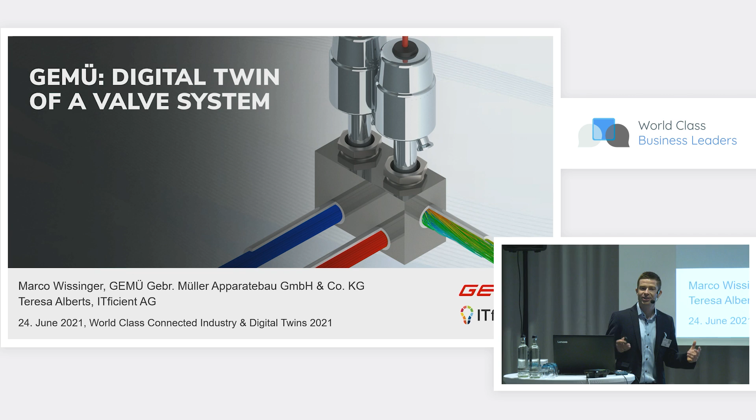But first, a short introduction. My name is Marco Wissinger, and I'm a development engineer at GEMÜ. I've been with the company for 2 years now, and I'm working in the pre-development department at GEMÜ.

Hello, also from my side. My name is Teresa Alberts. I'm the CEO of ITficient and had the pleasure to do the project management for this project with Marco.

So I will go on with a short introduction of GEMÜ, my company. GEMÜ was founded in 1964 in a small city in the northern part of Baden-Württemberg. GEMÜ is today one of the global leading manufacturers of valves, control and measurement systems, and considering sterile application, GEMÜ is here the market leader. Starting with 1 employee, GEMÜ has grown to a company with more than 1,900 employees with a total group turnover of more than 330 million euro.

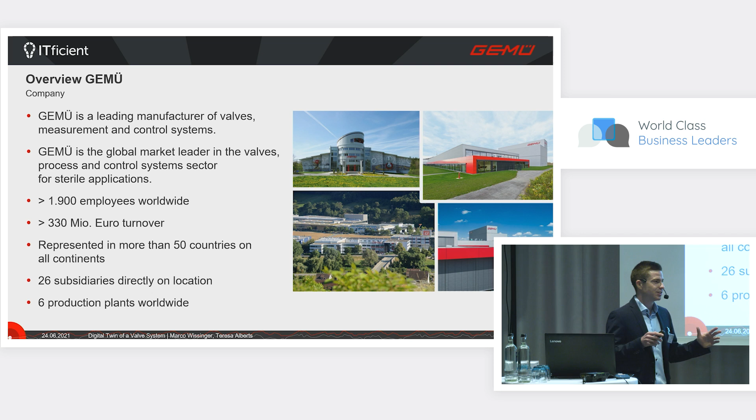GEMÜ is of course not only represented on its German sites, which you can see here on the slide, but also in 50 countries on all continents, including 26 subsidiaries and 6 production plants.

To give you more information about the organizational structure, I prepared the following slide. In general, GEMÜ is divided into 4 major business units. The first is displayed here on the slide: the business unit Food, Pharma, Biotech, and the representative product of this business unit is the so-called multi-valve port block, or M-Block, made of stainless steel,

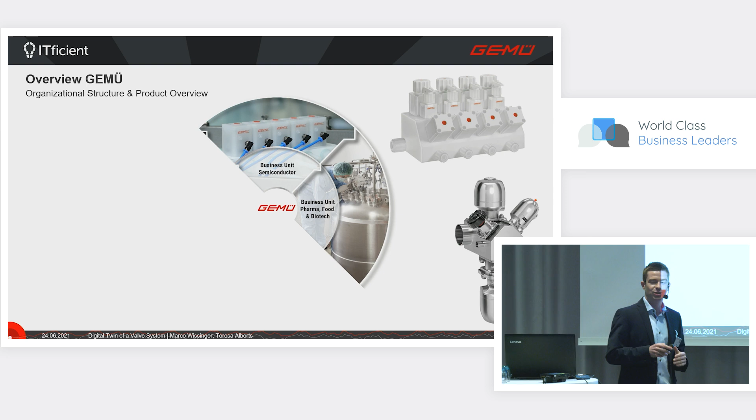which has very good capabilities in cleaning and is very space saving. The second business unit is the business unit Semiconductor, which is a very fast-growing one. Here, valves made of plastics and M-Blocks made of plastics. One special kind of plastic is a fluoropolymer, due to the aggressive media our customers use in their processes.

The third business unit is the business unit Industry, and here high demands on lifetime and huge cross-sections are with our products. The last one I want to mention is a small business unit, the business segment Medical, and here our products are involved in complex analysis and lab machines of our customers.

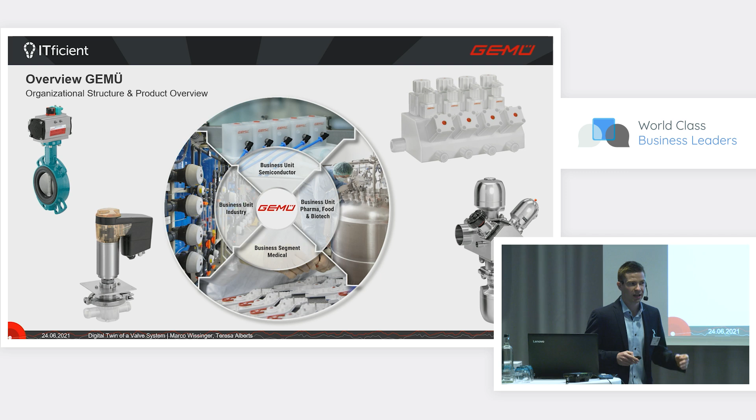Here you can see a single-use valve body which is mounted underneath one of our electric drives. So GEMÜ is not only developing and manufacturing electric drives, but also pneumatic and manually driven drives.

Products of GEMÜ and their usage at our customers' processes are of course not that familiar for people like you, which are not involved in the world of valves in general. So I prepared a picture on which you can see an example process, an example for a bioreactor or fermenter, which we developed and manufactured for one of our customers.

The main purpose of this bioreactor is to grow a certain bioculture in its tank. As you can see in the slide, the dimensions of this bioreactor are not that big, at least compared to some other processes of our customers.

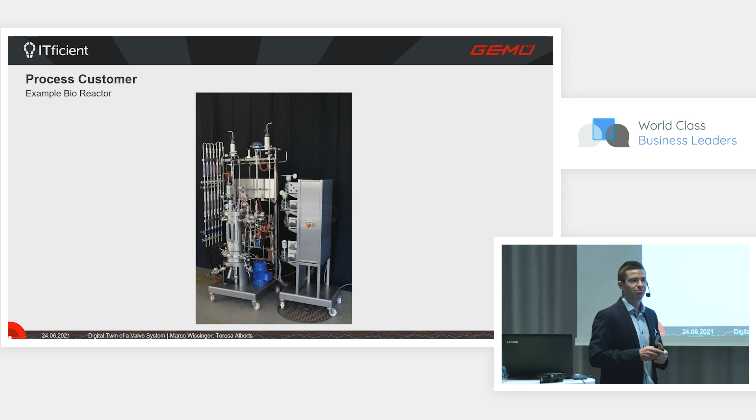I prepared a schematic drawing of this bioreactor, and as you can see, it's pretty complicated, but indeed it is. You can see all the components involved in the process, and it's not only the growing of the bioculture, but also the sterilization process and the cleaning process, which has to be considered while manufacturing and engineering the process.

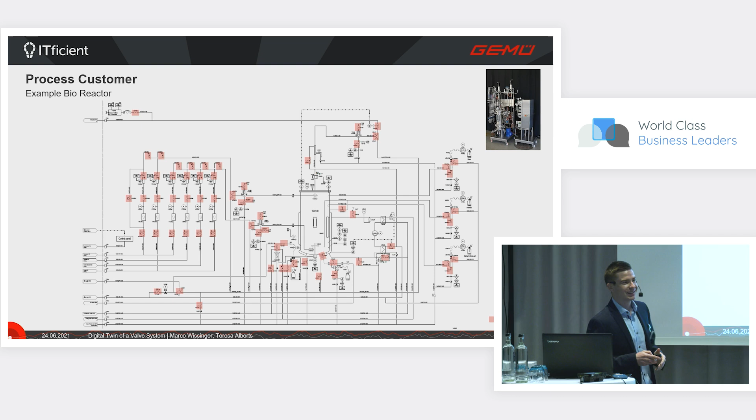To give you more information about the importance of the GEMÜ valves involved in this system, I colored all the GEMÜ valves included here in red. As you can see, there are quite a few GEMÜ valves involved, and they are very important for the operability of the system.

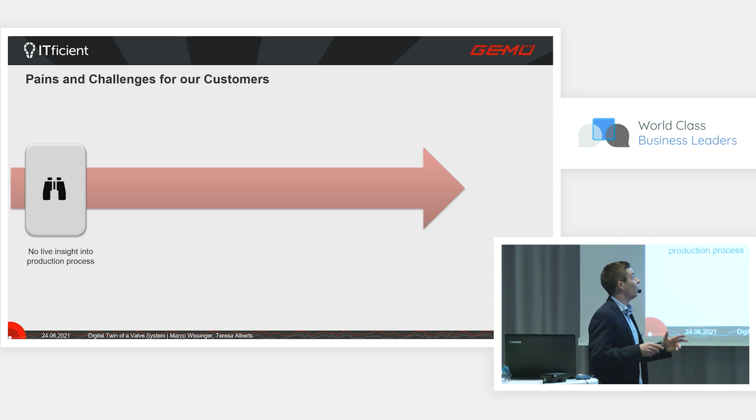Going on with the pains and challenges our customers face every day in their daily work. For example, today there is almost no live insight into their production processes due to the lack of physical sensor data. Of course, the asset costs are pretty high, due to the requirements of our products to get easy to clean and have high purity.

The processes of our customers are pretty complex, so the performance of these processes has to be evaluated while engineering them in advance for a lot of different boundary conditions. Of course, downtime is pretty expensive, whether due to maintenance, failure, or cleaning of these processes. And the last thing I want to point out, a very important one in my opinion, is that the product quality of our customers' products is often pretty critical. Think about medicines, pills, vaccines, or even food.

So we searched for a technological way to tackle all these challenges and pains, and therefore we found the concept of the simulation-based digital twin of a valve system.

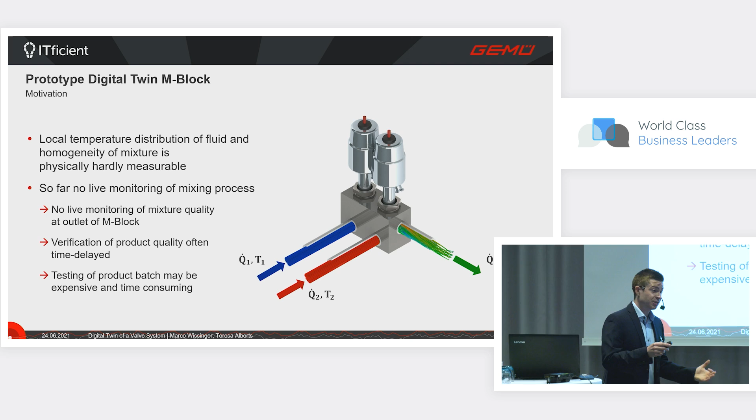And think about much more complicated mixing processes. The verification of these processes is often time delayed, and the verification process itself is of course time consuming and even expensive.

Therefore we wanted to create the prototype, and the main objective was to give a real-time forecast about the homogeneity of the flow and the local temperature distribution, based only on two physical sensor data points, namely the volumetric flows at the inlet of our M-Block. So with the real measured sensor data of these two inlets, we are able to give a real-time forecast about the homogeneity of the flow and the local temperature distributions.

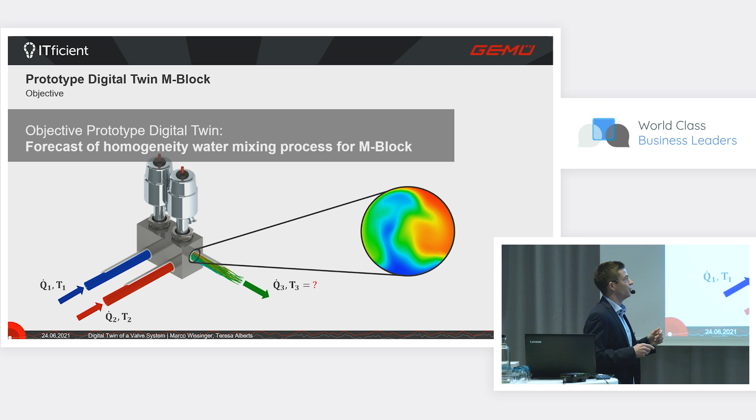So now I want to hand over to Teresa to go on with the project approach.

Thank you. So you have heard about the prototype and the use case, and I think it was very important at the beginning to discuss what is the best use case to start a project with the digital twin. So what we did is we did a workshop. We sat together with different departments at GEMÜ and discussed possible use cases, but also discussed the big picture, what they want to reach with the digital twin, and also what's the added value for GEMÜ as well as for the GEMÜ customers, because at the end, the digital twin should always be an instrument used from both sides.

We started with that in a first step, and also had a look at the IT infrastructure and the different simulation models that were already used in product development. After that, we started with the prototype, and I think that was a very good approach to do it in a very short time.

So we did the prototype in different milestones. If you call it MVP or proof of concept, it actually doesn't matter, right? But to have fast results and show that, and have the possibility to show that to different people. After the prototype, we did the validation phase, which we'll speak about later, and I think that's very critical.

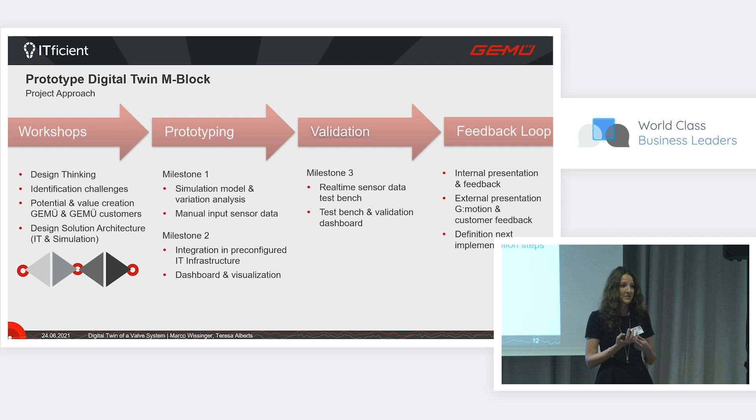If you speak about digital twins and specific information that you deliver, it's very important to be sure that the information is right. After that, we did the feedback loop with management and showed the solution to different customers. GEMÜ had an event two weeks ago, the G:motion, where they really showed the digital twin and went into discussion with the end customers, which was really interesting, and then went on to further develop the solution.

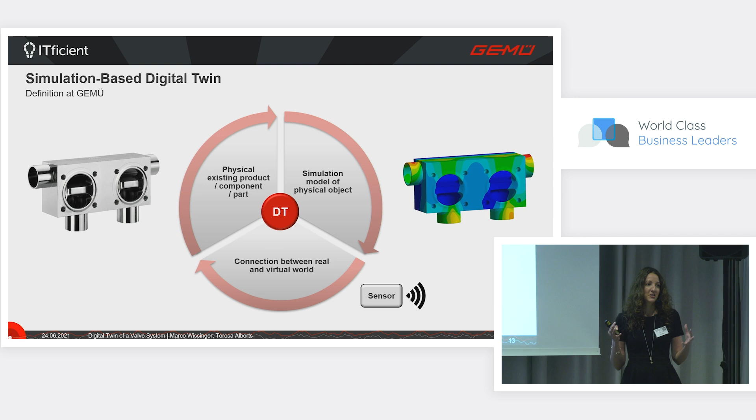So when we speak about simulation-based digital twins, I'm not sure if you're aware of the combination. It's actually what everybody knows, I'm sure, in this room: you have a product, you have a component, you have different sensors, right? And then normally the challenge is, you know it, that you are not able to place sensors in all the places that you need, right?

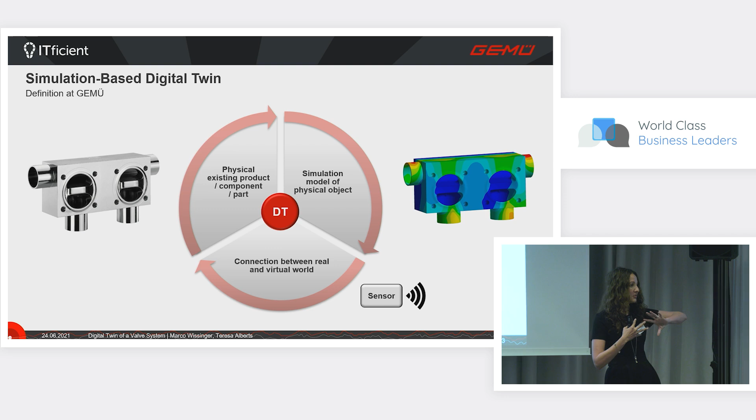To really get the information and do the prognosis and the analysis, what we combine is the existing component and additionally a simulation model, combining the know-how from the whole product together with the know-how from engineering, and then doing analysis and predictions in combination of both sides or both sources.

To go a bit deeper from the technology point of view: you have the component and the simulation model. If you work with simulation, you know the challenge is that creating the model takes time. So what we did here is use the reduced order model method to make it real time, so you're able to measure the information in real time.

The combination of these two worlds has the nice advantage that you're able to place virtual sensors, and that's what we'll show you in a second. This means you can place sensors virtually, put them into the data set, and use it further, for example for predictions, lifetime analysis, what-if scenarios, and then use the information further in the company.

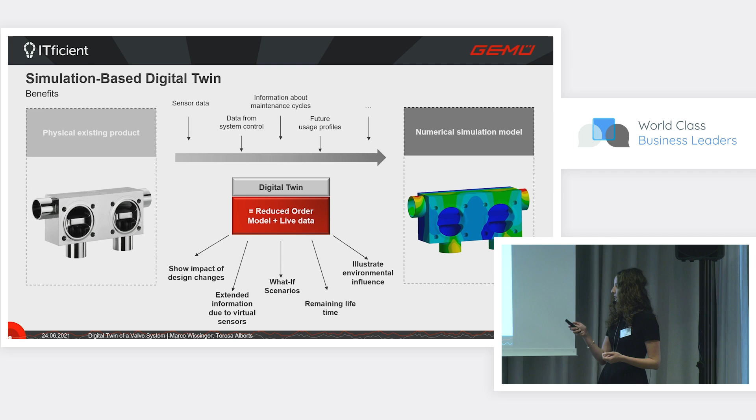Marco will show you in a second how the prototype looks. From the setup, of course, you have sensors, then you have this reduced order model where you feed existing sensor data, combine it, generate these virtual sensors, and then visualize it.

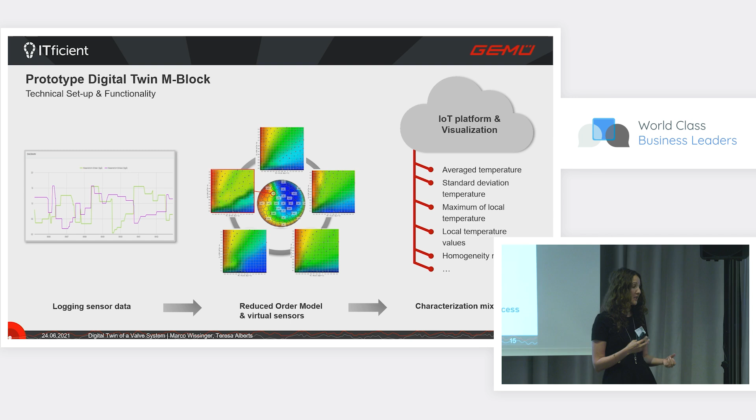We put this information into an IoT platform with the visualization that Marco will show you, to really characterize this mixing process and get more insights and information about the temperature, average temperature, and homogeneity of the mixture.

I think that's what I'd really like you to take with you: it's not possible to have real sensor data at this outlet, and if this information is really important, then with virtual sensors you can combine it.

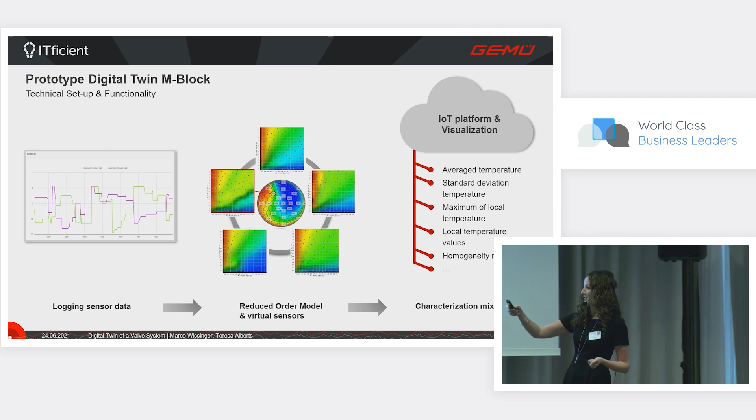So then, Marco, if you would take over and show the prototype. Of course, thank you very much, Teresa.

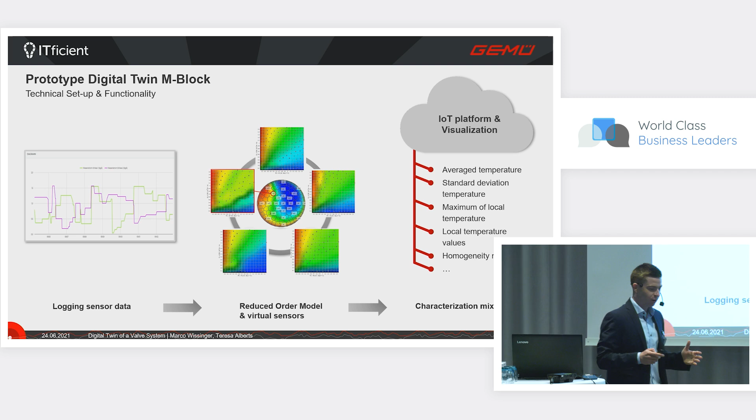As Teresa mentioned, with the simulation model we're able to get information about local temperature distributions and homogeneity. With these simulation results we're able to characterize our mixing process completely, and the information is afterwards displayed on a certain dashboard, which you can see here.

Before I start a short video to show you all the nice features of this dashboard, I want to mention a few words. As you can see, the dashboard is pretty simple, so it's understandable for almost every person. You don't need knowledge about simulation techniques or mixing processes. So I'll start a video and give you some information about the features.

As you can see on the top, there are the real measured sensor data, sensor data of the volumetric flows. In the lower part of the diagram, you can see the volumetric flows of the real sensor data over time, and also some virtual sensor data. Here, maybe you can see it in the bluish line, it's the average, which is a simulation result. It's not only the actual data displayed here in the diagram, it's also some historic data.

We're able to go even further into the past with the use of the calendar, which you can see here. Let's check what happens if we change the volumetric flows at the inlet, so the process parameter changes. You can see that the actual values of the sensors change, but more importantly, at the right side of the slide, the results of the simulation change almost in real time.

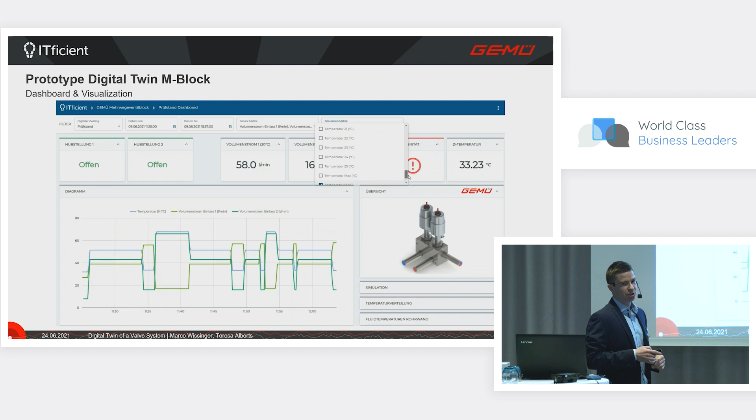That's the palette of, let's say, the physical sensor data, but the next one is the virtual sensor data, and it's a huge palette, mostly local temperatures in the fluid or information about homogeneity and standard deviation. So let's pick the standard deviation of temperature in the outlet cross section and the homogeneity information, and you can see the diagram dynamically adjusts according to the changes, and now the actual and historic states of these virtual sensor data values are displayed in the diagram very nicely.

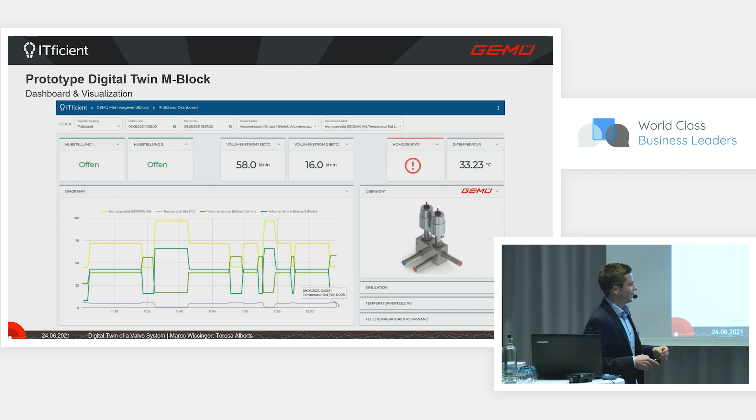A very important feature, in my opinion, is the next one. You can see a contour plot of the temperature in the outlet cross section, and with just one view you can see that the homogeneity of the flow is not good at the moment for these process parameters.

But let's see what happens if the volumetric flows at the inlet change, so the process parameters are changed by our customers, and you can see that the contour plot dynamically adjusts in real time. So it's the simulation results in real time, which you can see here.

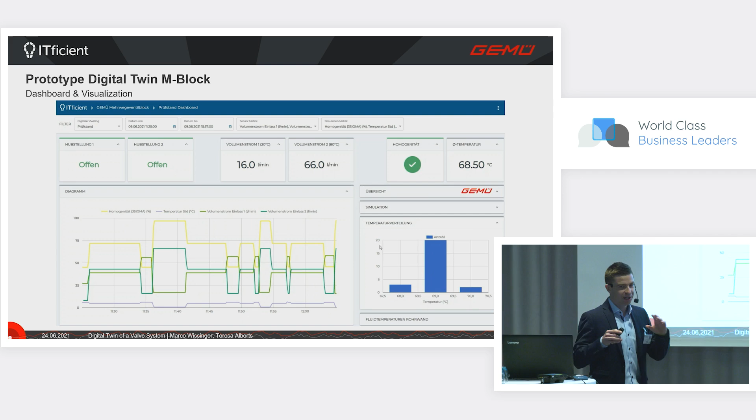And the last thing I want to point out is some kind of histogram of the temperature distribution, which you can see here now. Again, you are able to get information about homogeneity and local temperature distribution at the outlet cross section. I think this shows really nicely - this was the prototype done after 3 months - the different points like virtual sensors, the combination, the homogeneity that was shown, how you can show that in an easy way to discuss it and then further adapt it.

And when we did that, of course, you get specific results, and then everybody's asking, okay, how good are the virtual sensors really? So this means this actually is the next step that must be done: the validation.

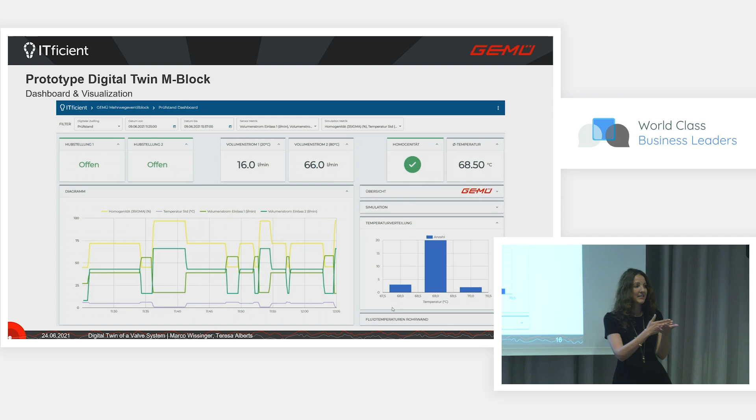As Teresa mentioned, yeah, of course, we wanted to perform the validation to evaluate this new technology in our company. The results were very good. We had a good fit between the predicted temperatures and the real measured sensors.

Some words to the experimental setup used for the evaluation or validation process. You can see it here on the screen - for example, the inlet of the hot and the cold water. You can see the physical twin, so it's the M block we used for our validation, and you can also see some sensors we used for the validation, some temperature sensors.

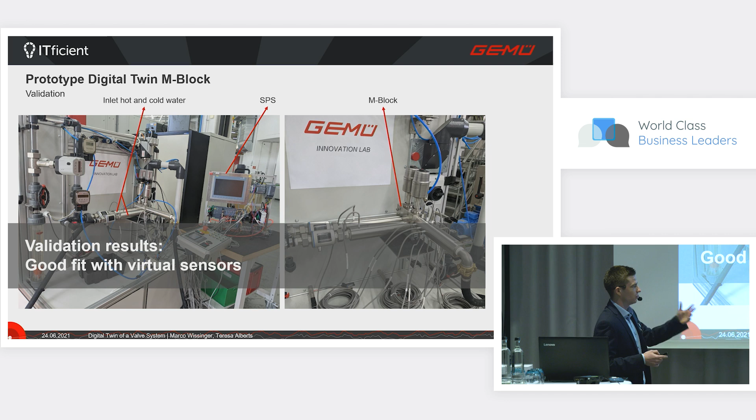The last slides consider some benefits for our customers and for GEMÜ as well, which is very important in my opinion as well. So just starting with the added values for our customers.

As I mentioned before, as Teresa mentioned before, today we are able to give live insight into the mixing process due to the virtual sensor technology, which is really one of the key technologies of the simulation-based digital twin. With this special kind of simulation model, the reduced order model, we are able to have real-time capabilities, real-time calculations, and with the combination of the dashboard, we are able to give overview over actual and historic states of the mixing process.

With these real-time capabilities, our customers are able to improve their production process, their mixing process in real time.

Coming to the added values for GEMÜ, I said it before, so it's the reduced order model. It has real-time capabilities, and therefore we are able, in the research and development department, to understand the physical processes within the block much better.

With the use of some specific sensor data of our customers' plants, we are able to predict or give information about the performance, the mixing performance of our M blocks in advance. Of course, we are able to create new revenue streams through these smart products and smart services, and transform into kind of a complete process solution provider for our customers.